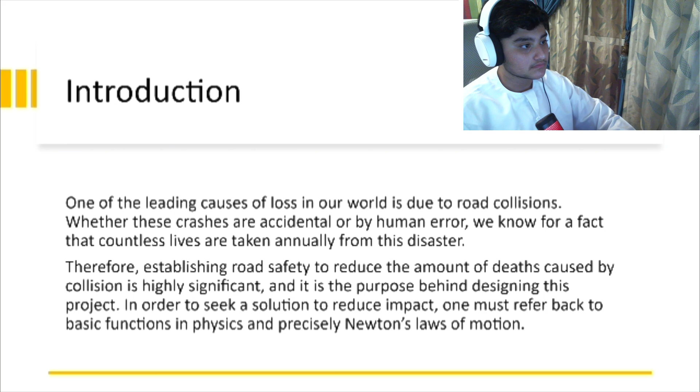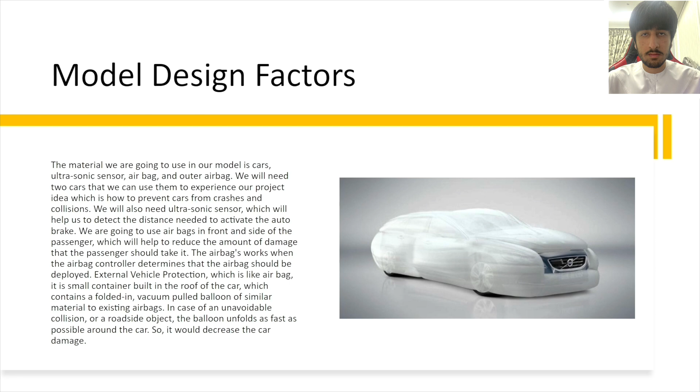The ultrasonic sensor will help us detect the distance needed to activate the auto brake. The airbag will help reduce the amount of damage the passenger takes. External vehicle protection will be built into the roof of the car, which contains a folded-in, vacuum pulled balloon of similar material to existing airbags. In case of an unavoidable collision with a roadside object, the balloon unfolds as fast as possible around the car.

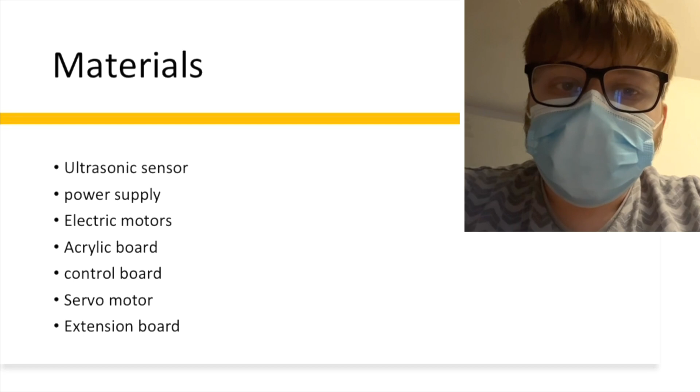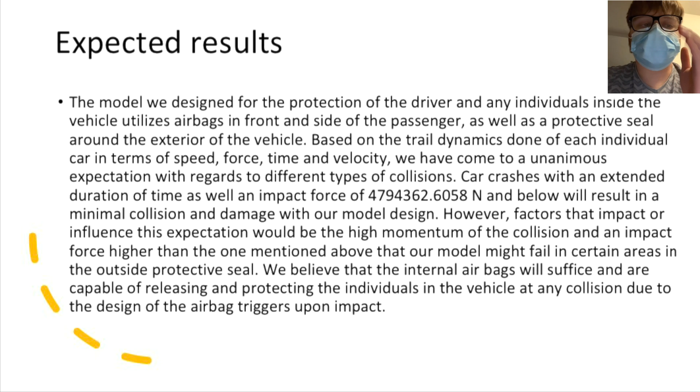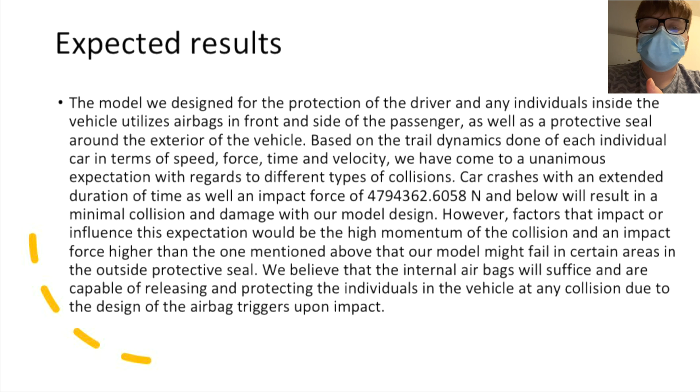Finished with the materials, we're going to talk about the expected results. The model we designed for the protection of the driver and any individual inside the vehicle, which is the car or truck, utilizes airbags in front and side of the passenger, as well as a protective seal around the exterior of the vehicle, meaning the outside, based on trial dynamics done by each individual car in terms of speed, force, time, and velocity.

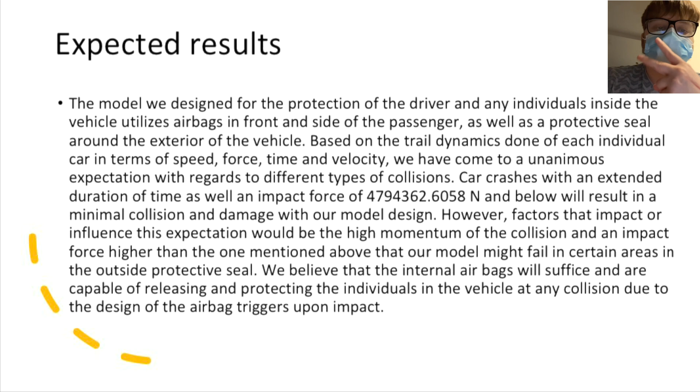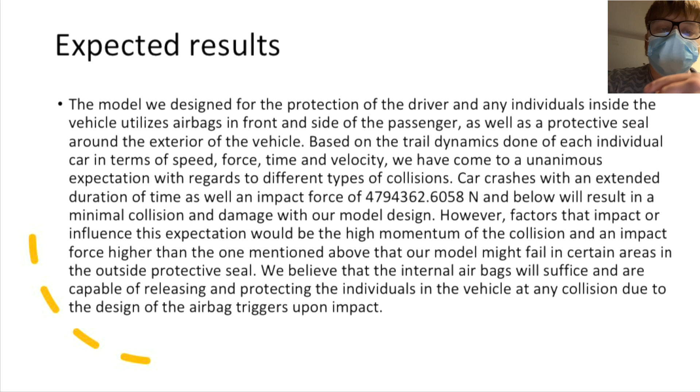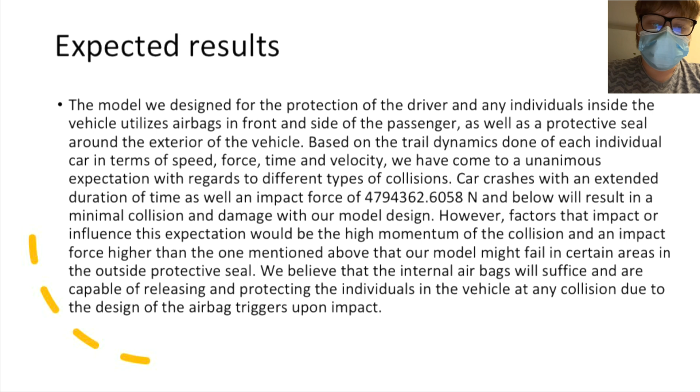We have come to a unanimous expectation with regards to different types of collisions and car crashes with an extended duration of time, as well as an impact force of 4,794,362.6058 N and below, which will result in minimal collision and damage with our model design.

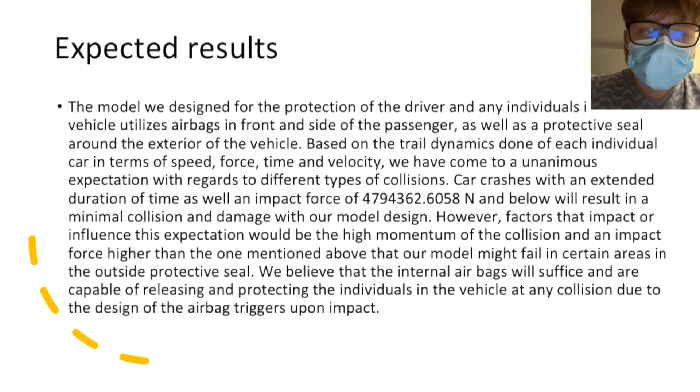However, factors that impact or influence this expectation would be the high momentum of the collision and an impact force higher than the one mentioned above, where our model might fail in certain areas in the outside protective seal. We believe that the internal airbags will suffice and are capable of releasing and protecting the individuals in the vehicle at any collision.

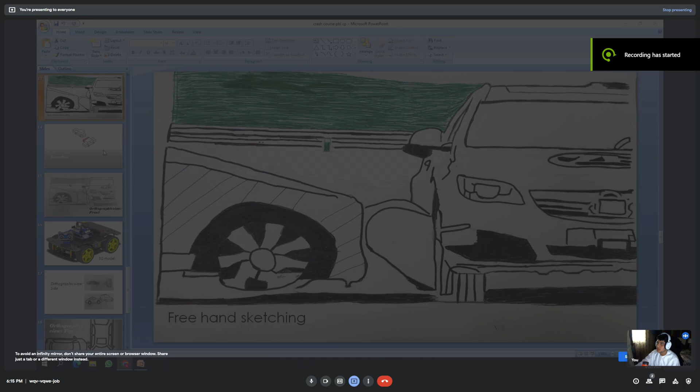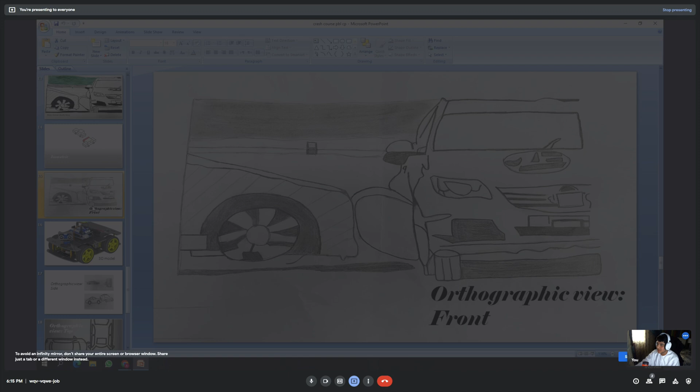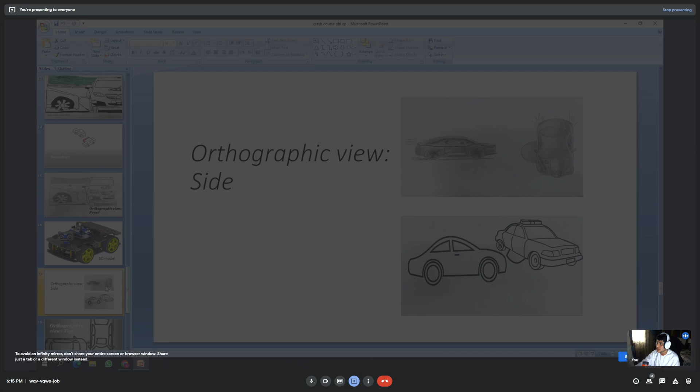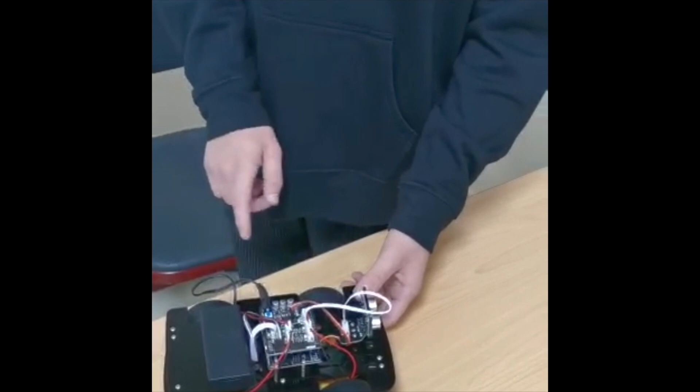First, we added the ultrasonic sensor, which measures the distance and calculates the speed to determine when to stop. Then we added the control board, which is used as the brain for the entire project.

Here we have the extension board, which is used when adding code and extensions. Down here, we added the servo motor, which gets information from the control board and gives it to the electric motors so they can stop.

The electric motors are motors that rotate the wheels. Here we have the power supply, which gives power to the entire project so it can run. Now I'm going to show you a live play of the project.

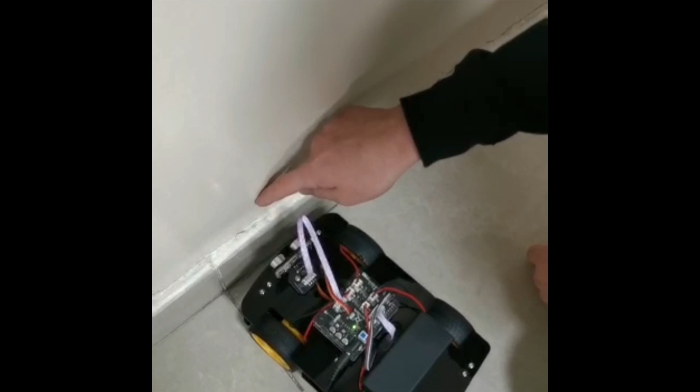As you can see here, the project measured the distance and its speed, and stopped exactly 5 centimeters away from the wall.

Ultrasonic sensor: in our program, we have displayed the distance measured by the sensor in inches and centimeters through the serial port. First, we are reading the temperature and humidity values from the DHT22 sensor.

We use those values to calculate the speed of sound. Then we get the duration the sound wave travels in microseconds, convert it to seconds, and calculate the distance from the sensor to the object in centimeters.

As a result, you will see the distance measured by the sensor in inches and centimeters on the Arduino serial monitor.

Then the servo motor, which is a small device with an output shaft, can be positioned to a specific angular position by sending the servo a coded signal. As long as the coded signal exists on the input line, the servo will maintain the angular position of the shaft. If the coded signal changes, the angular position of the shaft changes.

So by changing the knob position, the servo motor will change its angle. When the program starts running, the servo motor will rotate slowly from 0 to 180 degrees, one degree at a time. When the motor has rotated 180 degrees, it will begin rotating in the other direction until it returns to the home position.